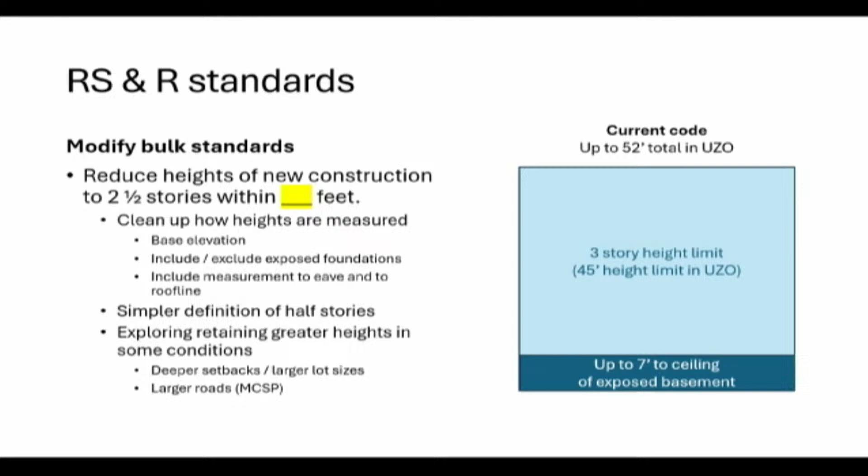Part of that could be that there's just a smaller number of homes built to 2.5 stories versus 3, so we want to be a little cautious there. But it doesn't seem like a 2.5-story requirement on its own would really bring the height or scale of buildings down. It's just getting the form to fit a little bit better.

Broadly though, I think this confirms to us that this is about the form and matching the context rather than controlling the size of homes.

The next thing I want to talk through is that we're taking a look at allowing detached accessory dwelling units within R and RS districts within the UZO. Some of the things we're contemplating here include potentially having a size difference for how large the DADU can be based on the size of the lot, again with the idea of fitting into the context a little bit better.

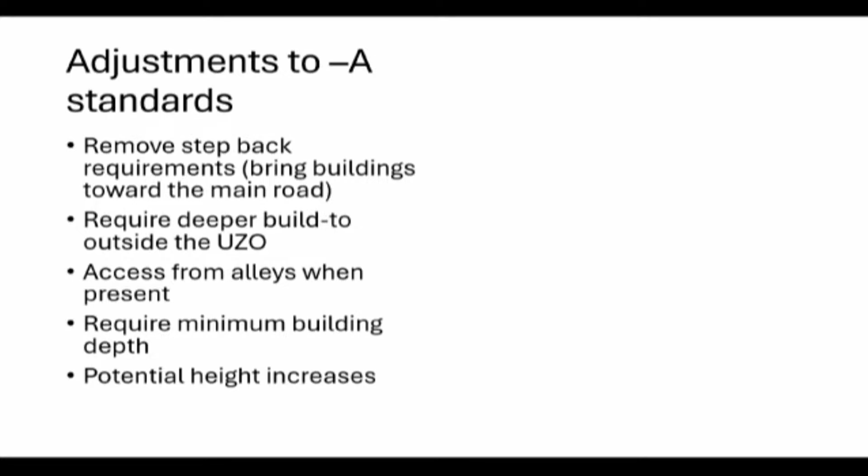Again, this is something we're trying to do carefully and put in context of what you can do under the base districts today. And so for that, I want to talk through what the conventional approach is to height.

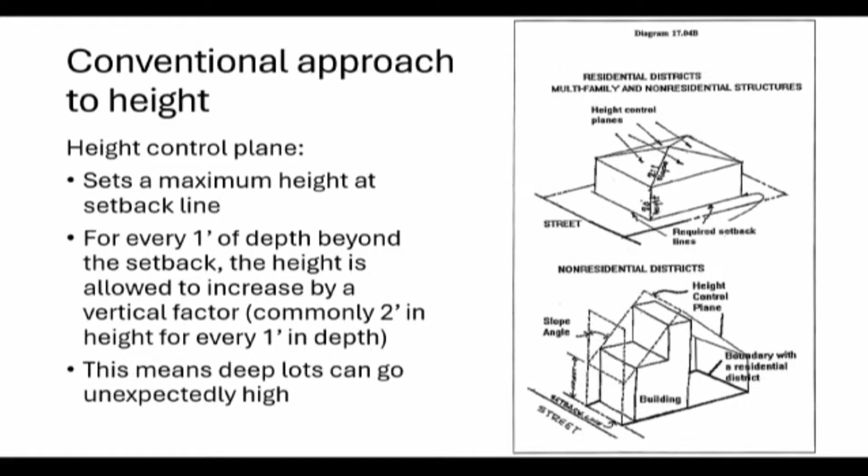Here it's the height control plane, where it sets a maximum height at the setback line, and then a vertical increase for every foot you go deeper than the setback. This means in practice, many lots can go unexpectedly deep, or unexpectedly high, especially very deep lots.

To give you a sense of scale, this shows the number of properties we have based on the parcel depth or side measurement. There's a really big peak of properties around 162 feet deep—that's a typical urban lot for Nashville. But you can see some go much, much deeper, 500 feet, 750 feet deep, that kind of thing. It's rare, but those conditions are out there.

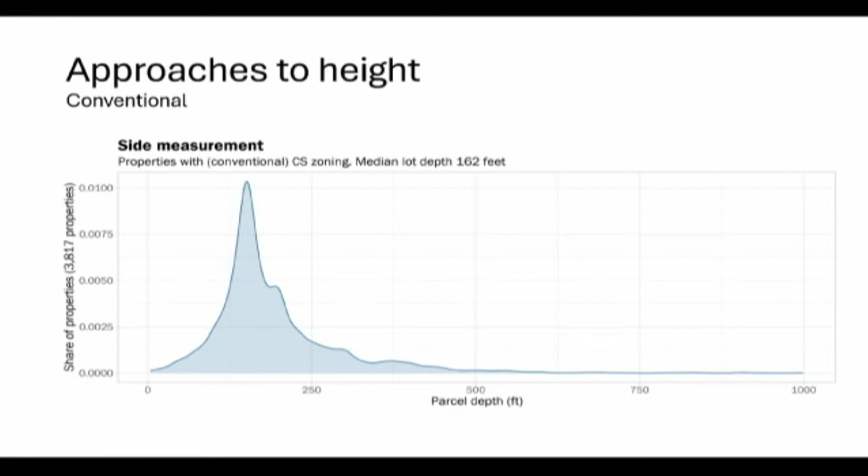So the way the height control plane works is you've got a setback, that's the purple on the bottom, the front setback on the left, the rear setback on the right. You've got a height at setback in blue, and then the orange lines are sort of the height control planes. Typically what we see is 2 feet in height for each 1 foot in depth from the setback. And so measured from the front and rear, 50% creates the kind of midpoint where the height is greatest.

Now it's this triangular shape, so we wouldn't really see buildings right at that peak. You're kind of looking at how much floor plate you could fit in below that. And then there's lots of other constraints that come in. If there's an FAR limit, that would keep the scale of the building down a little bit. And there's practical realities of construction types and how big your floor plate can be.

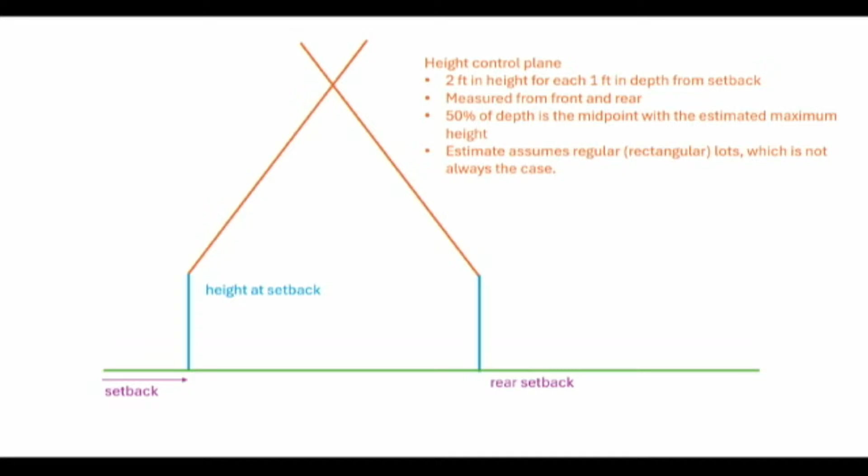But just to give a sense of scale, what I'm going to show through the next several slides is built around that maximum height at midpoint, just so you have a sense of how high that can get. The last thing I'll say is that this assumes a rectangular lot or a regular lot. Lots of our lots, especially in suburban areas, aren't like that, but that just contributes to and adds to the complexity of understanding what can be built through the conventional standards.

So this chart just takes that lot depth and converts it to a maximum height. And so whereas that peak of lot depth was about 160 feet, when you translate that over using the height control plane, you get to a max height of about 140 feet. Again, we don't expect buildings to actually get that high under this constraint, but it gives you a sense of how far it goes, how quickly.

And so for a typical size urban lot, here are two examples. The one on the left is on Charlotte Avenue. It's 150 feet deep, it's 1/3 of an acre. It's coded in our GIS as regular, so you can see it's rectangular. And so the max height at the midpoint would be 130 feet.

On the right is an example from Lebanon Pike, again 140 feet deep, a third of an acre. It's not regular—you can see the angles are a little wonky. And then you can imagine coming in from these different height control planes creates a very tough situation to expect what are you able to do. So that weird expectation, or tough to figure out what's actually allowed here, is part of what we're hoping to take a look at.

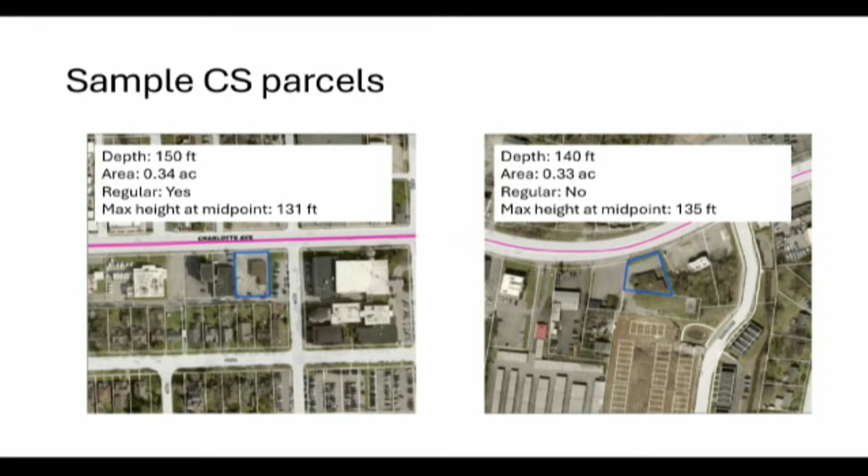So again, this is the distribution of how many parcels by what the maximum height at that midpoint is. I'm now going to add what the height limit for CS alternative is in context of this. So it's 60 feet, quite a bit more conservative than what is possible. Now again, that midpoint is never going to be achieved, but you've got quite a bit of height that you can get to short of that midpoint.

So that's just to highlight the weirdness of the current standard, the difficulty to implement, compared to something that is more predictable, brings the buildings closer to the street, away from the neighborhood, to get a better urban form in support of the transit system and overall livability.

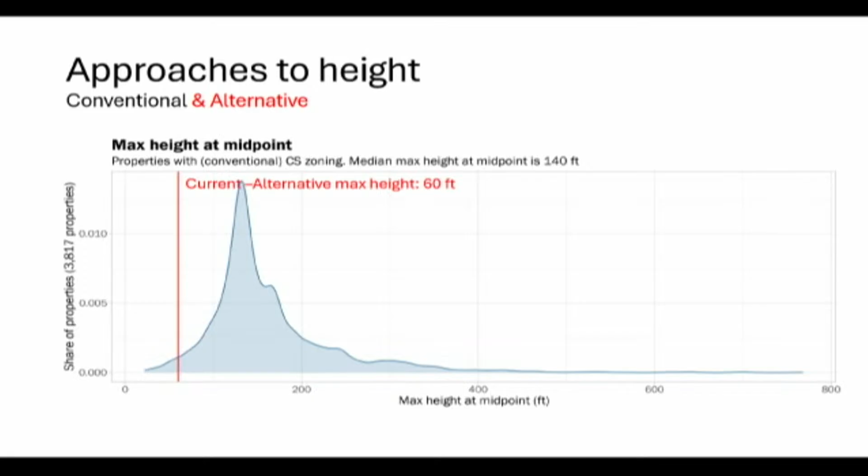All right, before I get to the new districts, the last thing I want to highlight is that we are working to calibrate an affordability bonus. This was enabled by the state a couple of years ago. I want to talk through some of the considerations that go into this. One is that the state only gave us the authority to do it for rental housing.

It's not an available tool for homeownership. Second is that it allows for a bonus on top of entitlements. So it's not something where we can apply an affordability requirement to someone's base entitlements, but we can say, if you go above this in some way, in exchange for that we can put in an affordability requirement. That could be relaxing height for taller buildings, relaxing a bulk standard for added bulk, or it could just be a density bonus in terms of number of units within the existing bulk standards.

And so that would take the form of some change in entitlements, like X change in entitlements, 2 stories or 0.4 FAR or something, for Y% of units at Z% of AMI. And so the calibration is figuring out what X, Y, and Z are.

That could be what standards are adjusted. It could be making sure we're getting something worthwhile out of this bonus, so maximizing affordable unit production. We don't want to set the exchange so high that nothing is produced, or so low that it feels like just a giveaway. We want to find the right spot where we're getting something of value for the additional entitlements.

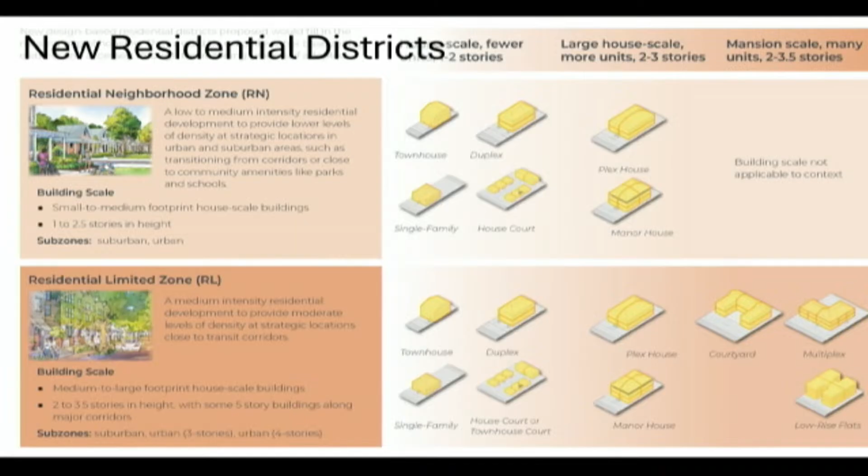So to implement this in the zoning code, there are 3 sections we would look to add. One would be a set of bulk standards that tie to the district, similar to the bulk standards for existing districts we have. Then we would have uses—what uses go with which districts. And then we would have form guidance for each of these different building types.

So the district bulk standards, as I've been referring—this is an example, again these numbers aren't final—include things like lot size, setback requirements, height requirements, that sort of thing. But the other thing I want to highlight is outlined in red.

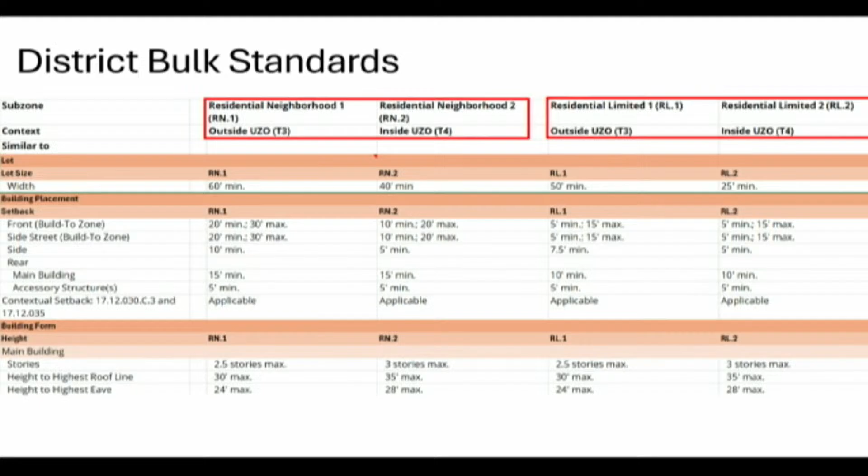We've been referring to these as two different districts, but the consulting team is actually calibrating the standards for each district to suburban and urban contexts. So we're actually getting 4, maybe 5 districts out of these that are structured similarly, but tailored a little better to whether you're in a suburban area, an urban area, or a more intense urban area.

Now, every zoning district has a lot of different things that can go in, so R and RS also include a lot of non-residential uses, things like daycares and schools. We would look to pretty much mimic that and not make any changes in the current districts, but mimic that within the new districts.

So here's an example of the first page of the conditions for one of the building types. This is the plex house, with a very famous plex house pictured to illustrate it, a description of what we're looking to achieve with this building type, and some basic information like number of units per building and number of buildings per lot. This part is very straightforward.

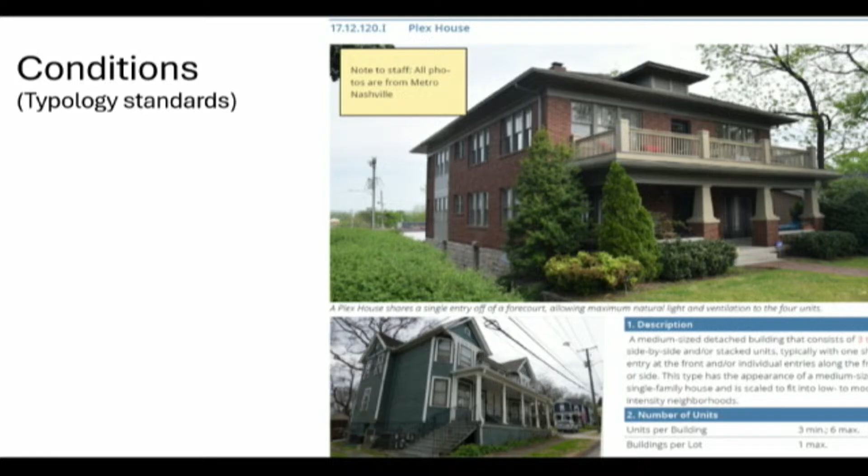The next page, I think, is very interesting, and it gets to part of what we're getting with this consulting team: folks who have thought deeply not just about these units in general, but what is it that makes it feel like it's part of a neighborhood. There's a few things that took me some time to wrap my head around that I want to highlight.

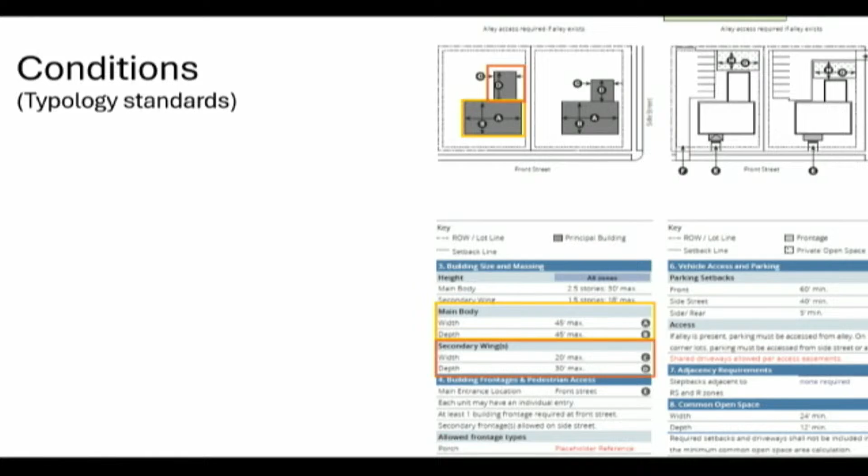One is where they've illustrated and labeled a width and depth, A and B. This is what they call the main body, with a maximum width, maximum depth, and maximum height. But they've complemented that with a secondary wing, which has a smaller depth, width, and height. The idea is that's a very common form you see in neighborhoods that have been established, where they've been added on to over time, so it naturally creates more sensitivity to context. It mimics the natural pattern of homes as they grow over time.

They also have standards for common open space, a minimum width and minimum depth. This is really critical in some of the courtyard forms—the cottage court, the townhouse court, and the courtyard apartments—where you're trying to build not just the homes, but that shared common open space.

Our expectation, as we've been talking through with people, is this is something that they're interested in. As we get the full set and roll that out, we expect to do a lot of work with people to understand all of the implications. We think this is really powerful and really useful, but it's also a very different way of regulating than what's in our base code today, so we're thinking carefully about how to roll it out and how to do education for folks.

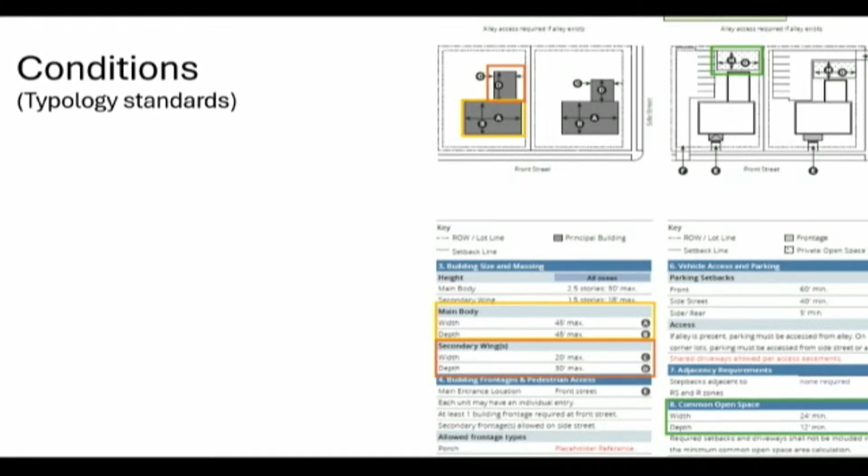Last, I just want to end—we're still anticipating in June having recommendations for the zoning code. As part of that, we're thinking carefully about the phasing and the timing. Changes that create opportunities but don't inherently change entitlements—the new districts—are probably a little easier, whereas changes that affect current entitlements and expectations probably will need a little bit longer time for the community to think about and discuss.

We're also thinking about the timing for the remainder of the work on this project, which is the community engagement to develop a recommended rezoning plan for how to use the new districts to find opportunities to get them tested out and built over the next couple of years.

Just to end, we've got a few more May workshops: James Lawson High School in Bellevue next Friday, and this room next Saturday for a morning session. We've added a virtual presentation on June 2nd, and we're working to schedule a second virtual presentation in Spanish, probably June 5th, but we're still waiting to nail that down. As soon as we have that, we'll do an email blast to let everybody know. With that, I'm happy to take questions.

Question: Are you going over the new potential zoning changes in the public meetings right now? Is that part of the presentation? Response: Yes, it's kind of a board-oriented open house workshop, so there's not a formal presentation, but we don't have quite this level of detail—we float all of these things during that meeting and spend a fair amount of time on the new districts in particular.